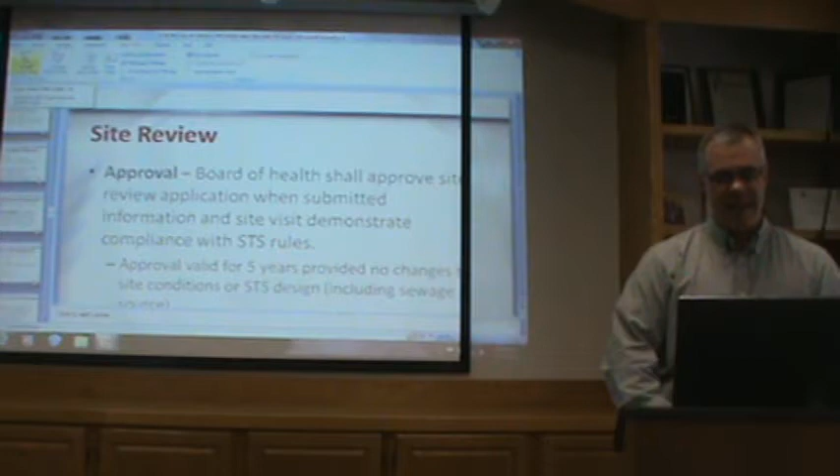Okay, let's get back to it then.

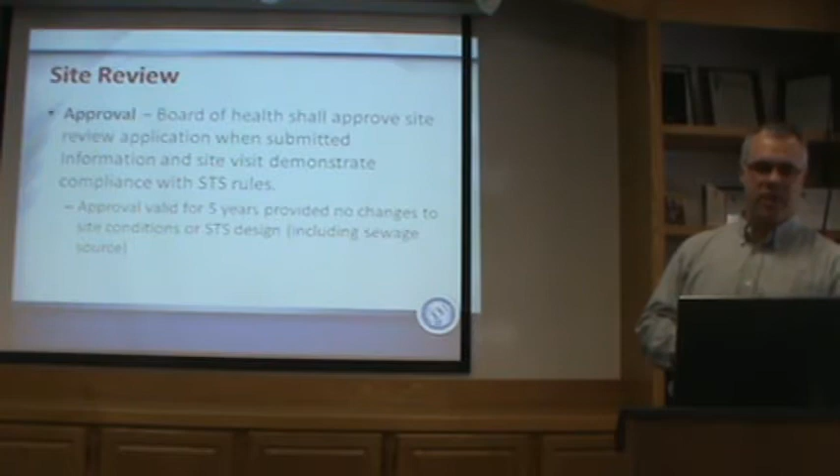Site approval. Site approvals will last for 5 years. Right now, our site evaluations kind of last indefinitely, there's never been a deadline on them. But now they're going to give us a 5-year deadline. I'm imagining that in 5 years, if you are opting to go have us look at that property, we can probably, quote unquote, renew it just by simply looking at it and saying, okay, yes, everything looks the same. With the exception of, and this does happen, someone goes out there and grades the snot out of it and it's all been destroyed. So that's an exception, but it's a 5-year site evaluation term based on the new code.

Permits, we talked a little bit about this earlier, about the deadline and the grandfathering. A permit is valid for 1 year. The board may extend a permit for an additional 6 months. So when someone asks, can it be extended? Well, according to this, it can. Please don't tell people you got 6 more months, that may or may not be on some of these grandfather systems. Permits are transferable upon sale of property, and certainly this happens, they can be revoked, or we might have to change the system type if they go out and destroy it. We talked about one of those earlier already.

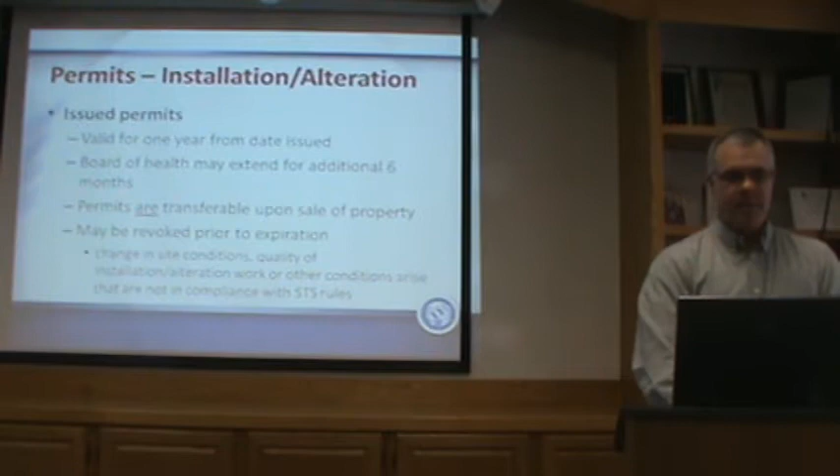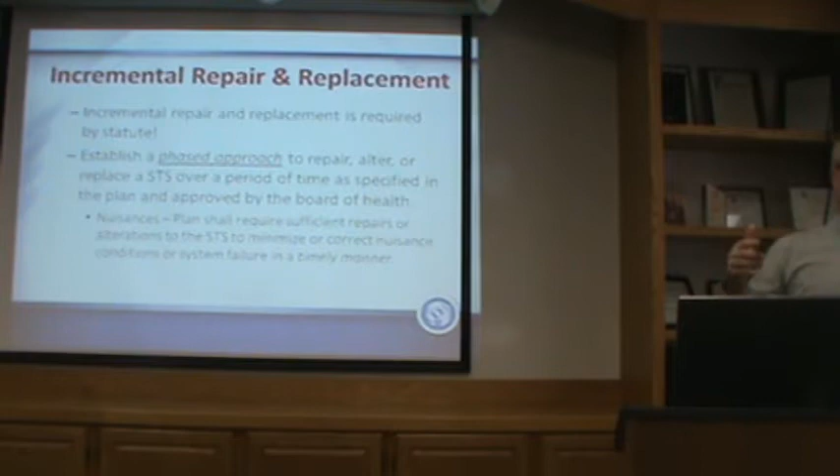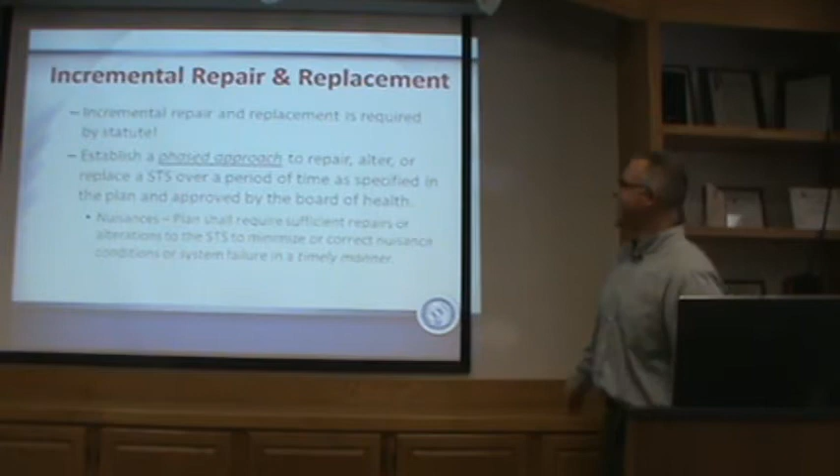Incremental repair. I don't know that anybody has a real good established way of doing this yet, but when it says it's required by statute, that means it's required that we look at it as an option. There are some systems, there's no incremental to them. For example, if you have a quarter acre lot and your leach lines fail and you need an aerobic system, I don't know how you can do an incremental repair on an aerobic system. It's got to be in or it's not, it's all the pieces parts. Start with the disc. Yeah, that's one way to do it. So anyway, we have to look at that as an option for people, but in some cases it's just not an option. But there are times that it is, where you can add some leach lines, get the public health nuisance to quit surfacing on the ground, but it's not a full-fledged installation.

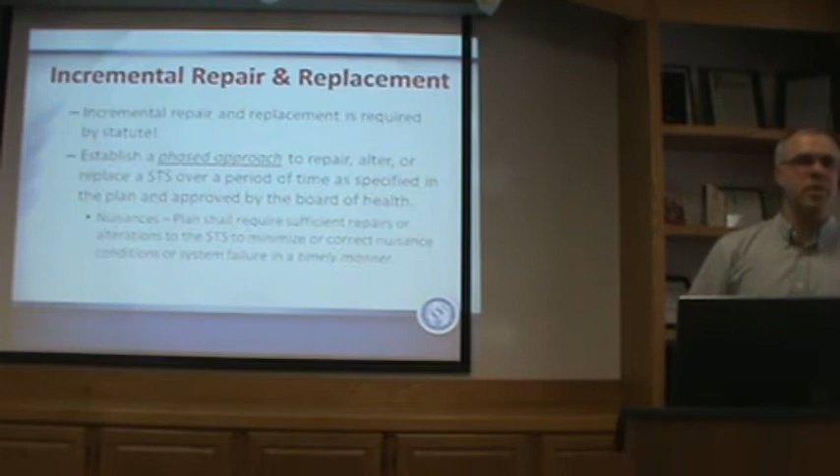So then we can incrementally, and we've done some of that over the years, tried to work with some of these systems and been able to do some of this already. I don't know if there's a hard and fast way of doing it, because every site's different and every approach would be different. But the bottom line is we want to minimize or abate the nuisance and then add components as needed. It's going to cost them more over the long term, it's like having interest. You're going to pay for that guy to come out on 3 occasions versus once. And guess what, we get to issue a permit every time you do it. Probably an alteration, the cheaper version, but nonetheless, over time it's going to be more expensive probably to do it.

And then here we are, the phased-in work. Conditions, we can set conditions on it for when everything has to be completed. Perhaps some soil evaluations need to be done, and certainly water usage. Conserving the water is going to help that system along, or perhaps even have them replace some old 5-gallon flush toilets and put in some of those wonderful 1.5-gallon flush toilets. Maybe something like that.

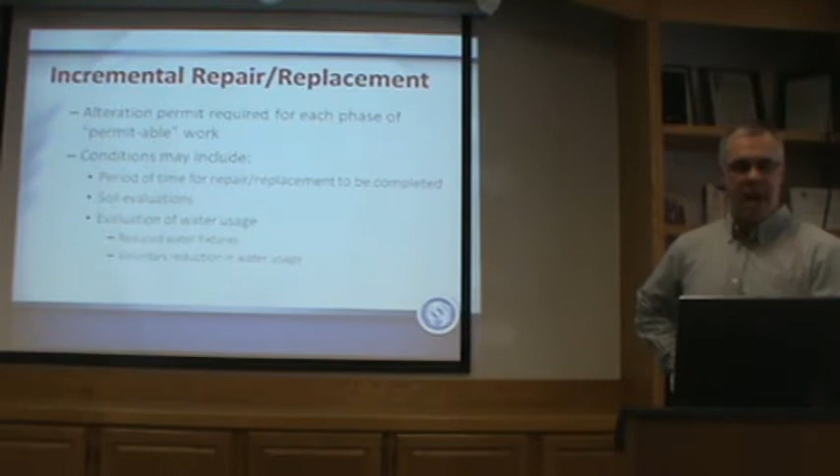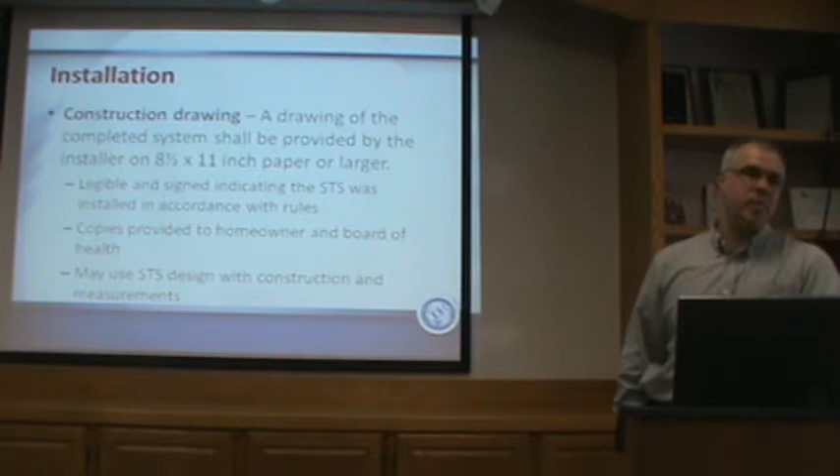Construction drawing, this is the as-built drawings that are required. Basically it just sets some minimal standards for those: 8.5 by 11 paper, legible. We appreciate it when it's legible. Copies must be provided to the homeowner and the Board of Health. So you want to give the homeowner a copy as well as us, and certainly keep one for your records.

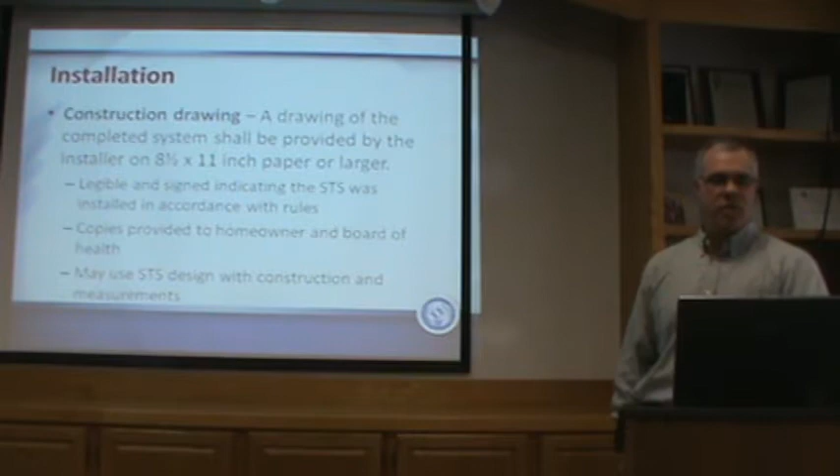Put on construction design measurements. And I wanted to highlight this piece here because sometimes we fail to do this. We want to make sure we're on top of this if we're not doing it already: the elevations, the vertical benchmark, and some elevation readings throughout the course of the system, so we can see that there's been fall installed into the system, and it'll help you also find some of these components with the vertical elevations and being able to determine some of their depth.

Has anybody tried lately, if you had no record on file, to go out and probe for EZflow, especially if they did a good job grading it? It ain't easy finding this stuff. I went out there, or SB2, that's another one. There's been some of that. Without a map, I don't know how I'd have found it in some cases. You probe every 6 inches, go right through it. So anyway, SB2, you get a football and it shoots at you. Some that work okay don't. Anyway, keep those things in mind to find this stuff.

Okay, let's move into flow estimations. Similar to what we've always done in the past, 120 gallons per day per bedroom. That's what we've always had for a number.

They clarified this, because here's what happens sometimes. We'll go out to a property and say, hey, your system's blown out, and they have an event counter, and we find out they're using too much water. Then I'll say, well, you're using 360 gallons per day, and that's too much. And they say, whoa, no, your system was designed at 360 gallons per day. No, that's not how this works. The law has now clarified this. 360 was peak estimated flow, peak. We don't expect you to do that every day. You might do it on occasion.

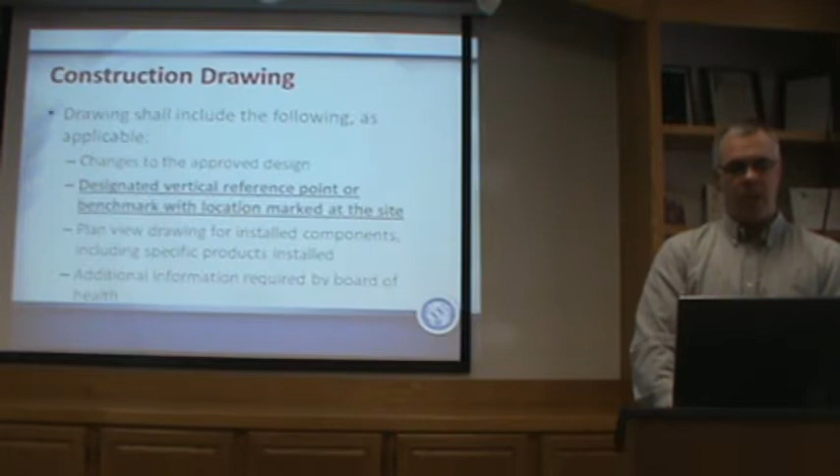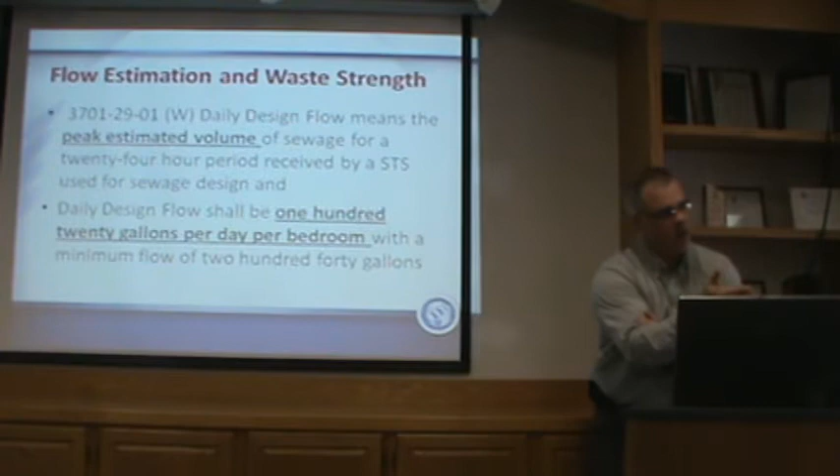Tom asks, what number are you using per person per day, just in casual usage? Well, the law does it by bedrooms. I understand that. Say there's 10 people in the house, and it's a 2-bedroom house. Is there a number? Well, you could do it a couple different ways. You look at the literature, and you might see 100 in the literature. The 10 state standards, basically 10 engineers from 10 states got together and said this is what we're going to use as a basis per person for design flow going into a sanitary sewer.

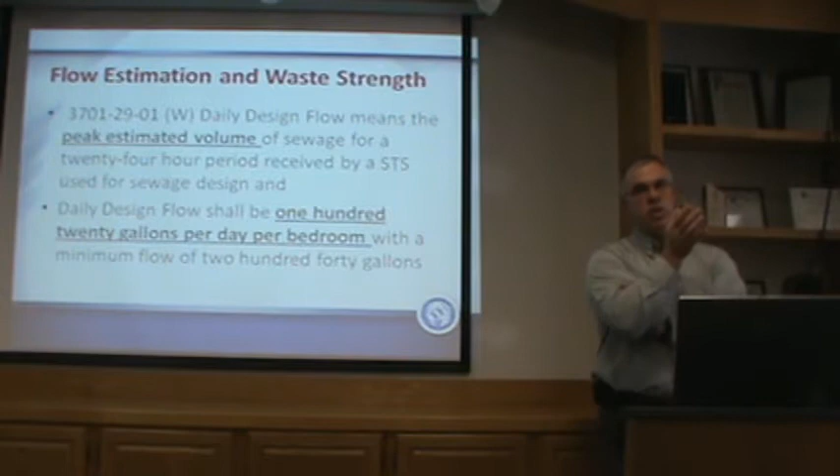And I've heard numbers like 60-ish, because you've got 120 gallons per bedroom, and you can put 2 people in a bedroom. This is all theoretical. So 60 gallons per person. I'd say 60 to 100 is probably a pretty safe range, which is each standard, a rule of thumb. But 120 is your standard, that's what you have to go by.

Probably depends on hygiene too. That's a joke.

Plus or minus, do we need to do a water study on some of these people where the systems are blown out all the time before you design the system? Just put a water meter in or have them track stuff?

Paul's asking, what if you have a system that needs to go in and you suspect a high flow, particularly if you've got a system that was recently installed and blows out in 2 or 3 years. We have asked for water meters to go on, and we've told them, you got 10 kids, we have no idea what you're putting out, but it's obviously too much. If I go out there and put another replacement system of similar or slightly larger size, it may not be big enough for you. So we have asked, in questionable circumstances, for that to happen. Sometimes it's like pulling teeth, but they don't realize that, how else do we know?

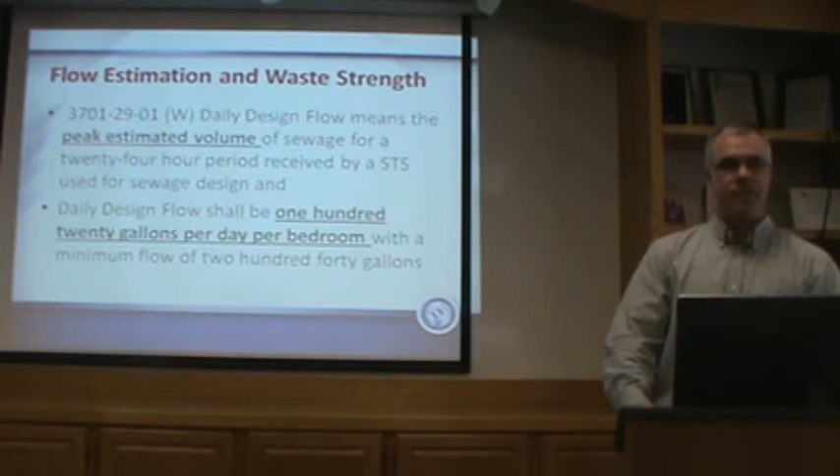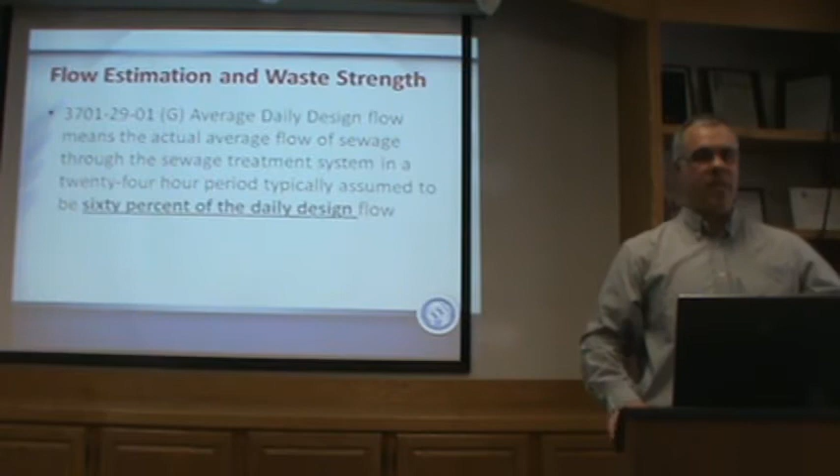Particularly on gravity systems, but under statute codes, are you allowed to make them go bigger if the house is only 3 bedrooms? That's where you'd have to get into the study and find the section, but yes, we are allowed to increase flows. We just designed a 6-bedroom system if there's fixtures or other reasons to do it. So you've got a big garden tub, a family with 3 bedrooms but 10 kids, I'd say yes, we'd be well within our rights to try to do that.

Well, that's what we were wondering, I didn't know that, if you had to stick to the 120 gallons. Not necessarily, not necessarily. You've done it with us before, we've increased the systems. The homeowners actually said, we use a lot of water. Yeah, that's voluntary though, telling us ahead of time. No, it wasn't voluntary, give them an option.

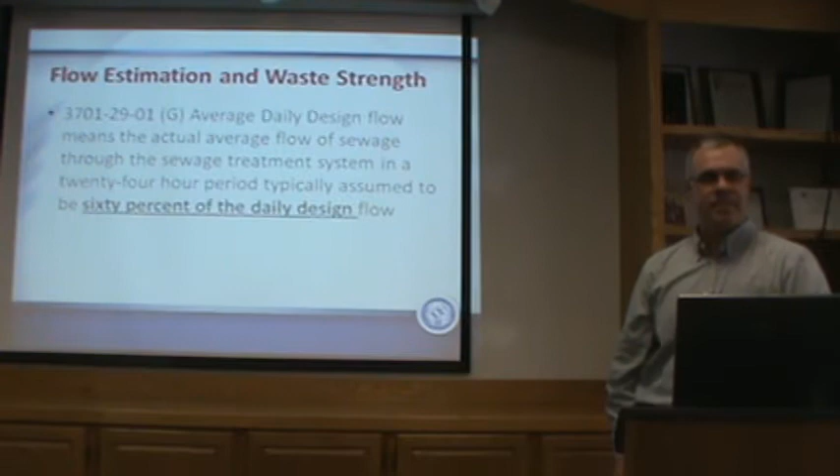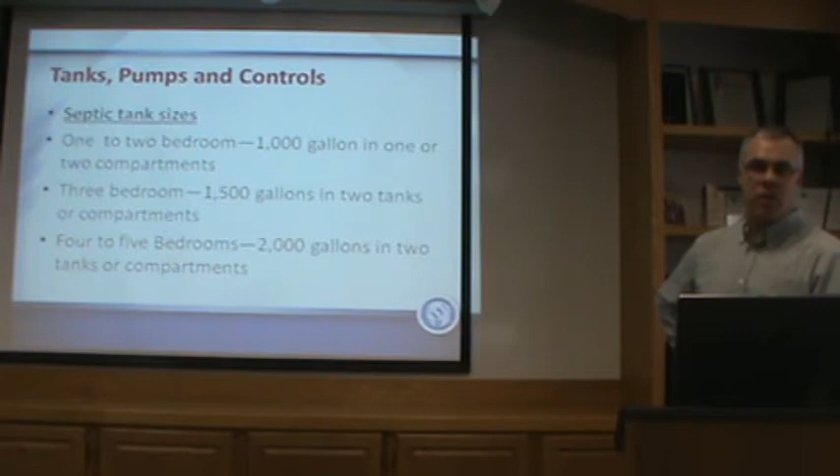All right, moving on to tanks. Tank capacities are the same as where they're at today for systems. 1 or 2 bedrooms, 1,000 gallons. 3 bedroom, 1,500 gallons, 2 compartments or 2 tanks. And 4 and 5 bedrooms is 2,000. I stopped there. There is one for 6, and there is one for small flow system designs, but we won't go over that today.

Those of you who do tank manufacturing, January 1st, 2016, they're talking about having a director's approval for those septic tanks manufactured for use in Ohio. So I don't know much about that. You might want to read that section a little more carefully or contact ODH if you want more information.

So if you have a tank custom built, he's got to get it approved, like a pump tank? We're getting these bigger and bigger pump tanks. Yeah, I don't know the answer to that. I'm thinking the tank manufacturer's going to be approved and have various products approved, but I can't say. I'm looking at the spray, the minimum is 1,500 plus 500 per bedroom. Oh. We'll have to see about that. I mean, it'd be ridiculous if you need a special tank and he needed to get that approved. Oh yeah, that's gonna drive the special tank price through the roof.

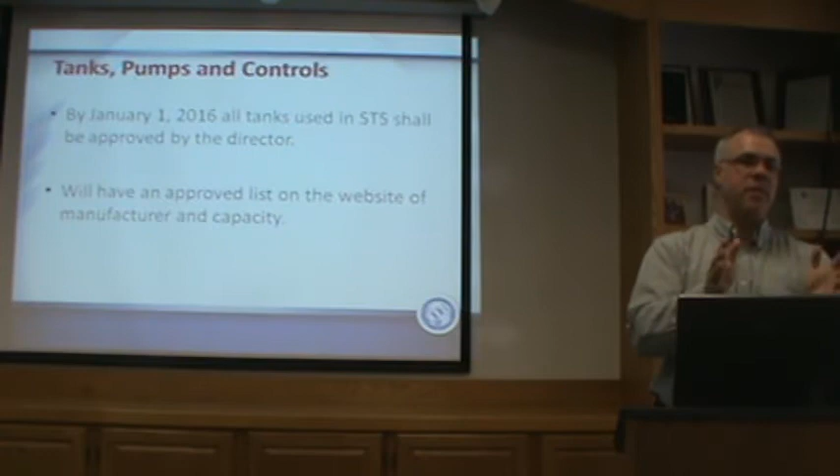Yeah. And there'll be a website, once this happens, if you have a tank manufacturer that you're not sure is approved or not, you can go onto the website after 2016 and verify that their tanks are approved by the director.

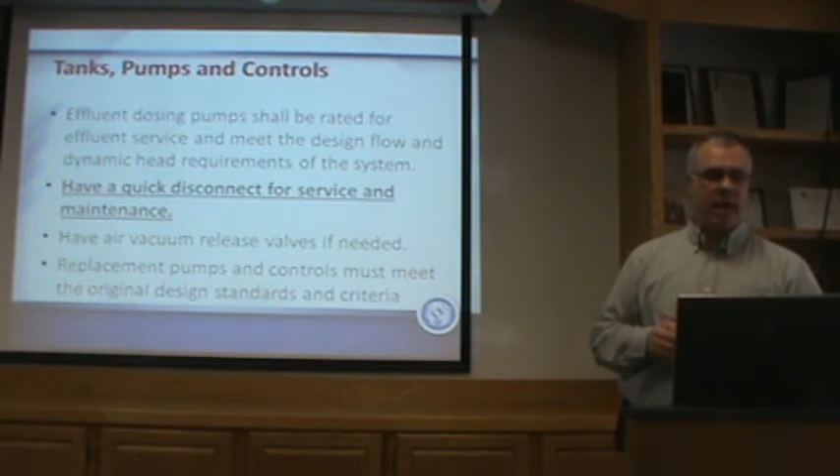Tanks, pumps, and controls. The one thing I want to point out here, because we don't always see it, is it now does require a quick release or quick disconnect on a pump for service and maintenance. So some guys don't do that, and you do need to do that now. All right, I just skimmed right across that stuff, and there's probably much more to be said, particularly about pumps and controls. But for the sake of time, we're not going to get into that.

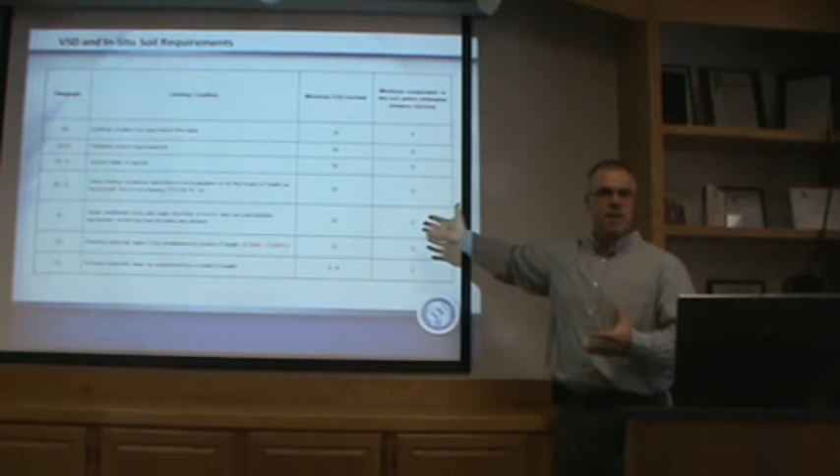So all that stuff is being covered here. This is a table that's in the rules, and the verbiage spells it out also. There's a lot of different soil characteristics that have various levels of risk associated with them spelled out in this table. So bedrock has the highest risk. Then you get down into seasonal perched water table, which if you recall in 07, in my estimation, that's what killed the 2007 rules. Seasonal perched water table vertical separation distance. It was just a mess. So many people were putting it in the seasonal water tables that they just couldn't come to grips on that kind of a change. So now it's come back.

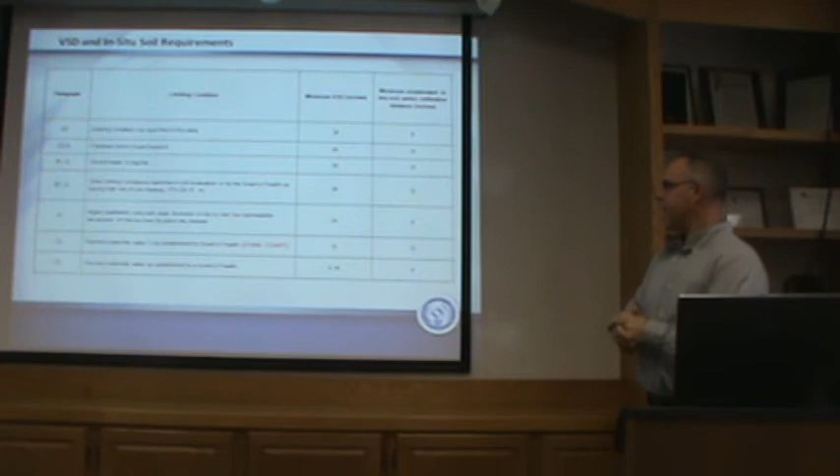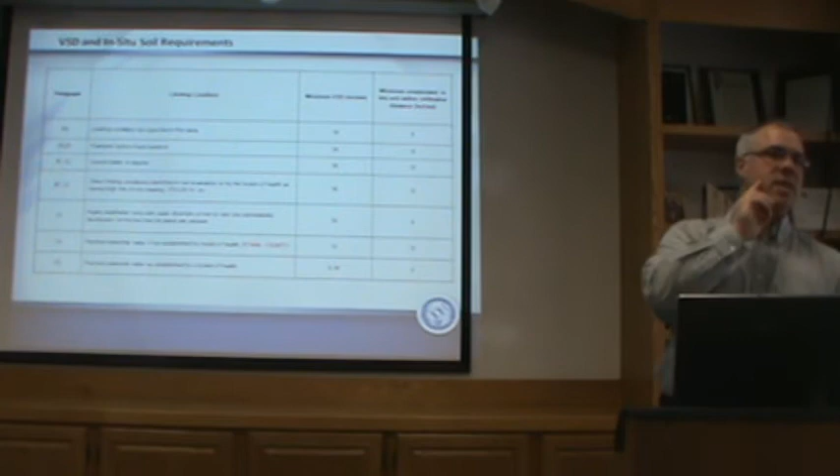State law allows every Board of Health, if they so choose, to establish a minimum vertical separation distance to seasonal water. And that law says we can do it anywhere from 6 to 18 inches. You choose. You need to know this, because as you work in other counties in the state, you're going to find that everybody did this differently, and that means your system designs are a bit different. We want state consistency, but it's not necessarily there, primarily because of that. Okay?

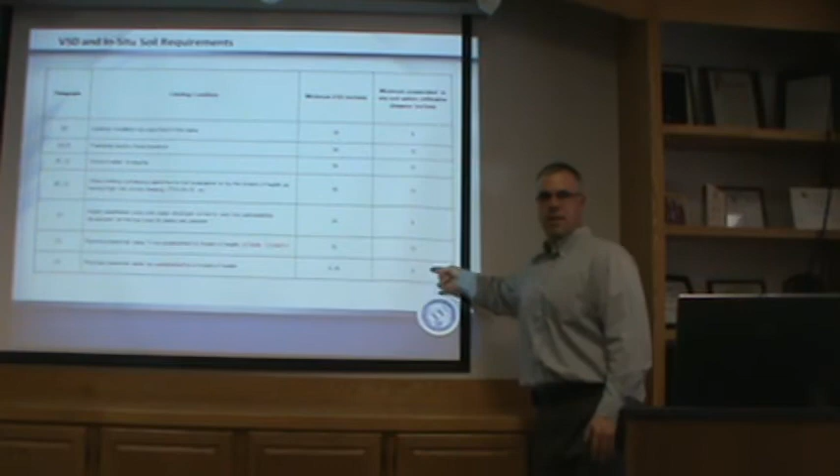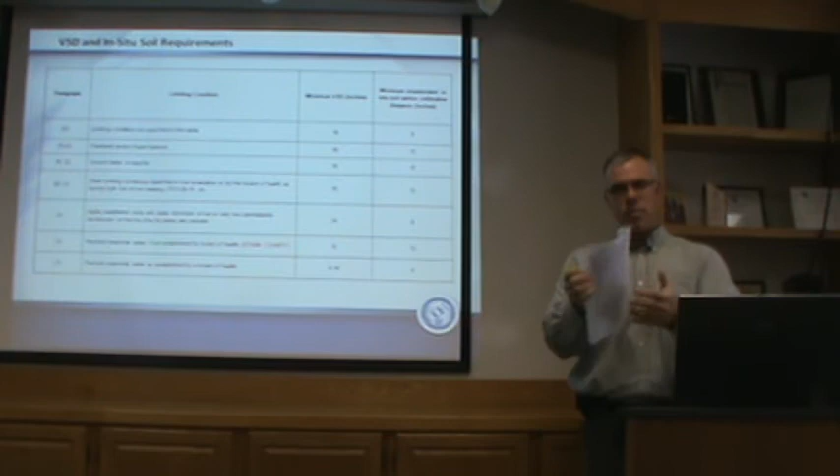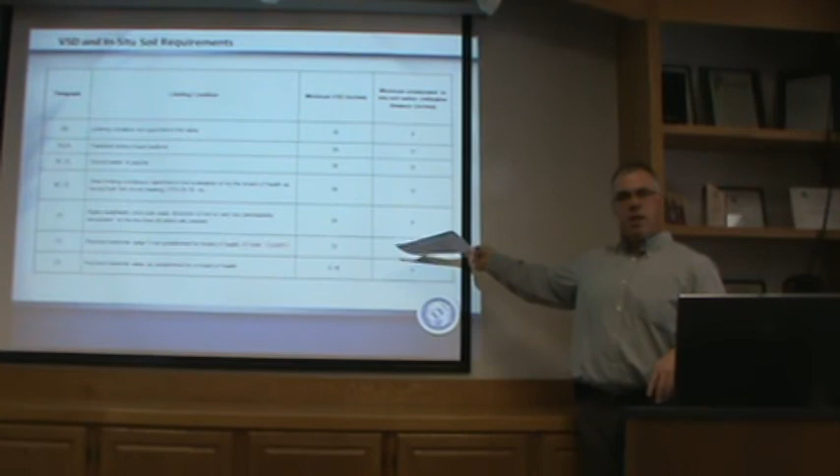State of Ohio said if the local health department doesn't choose to adopt a vertical separation distance, they give you a default, 12 inches. This rule that I talked about earlier, most of it's about O&M, but on the back page, establishment of vertical separation distance. Our Board of Health did adopt 12 inches. However, the state minimum here was 8 inches. 8 inches of in situ soil for the distribution of septic tank effluent.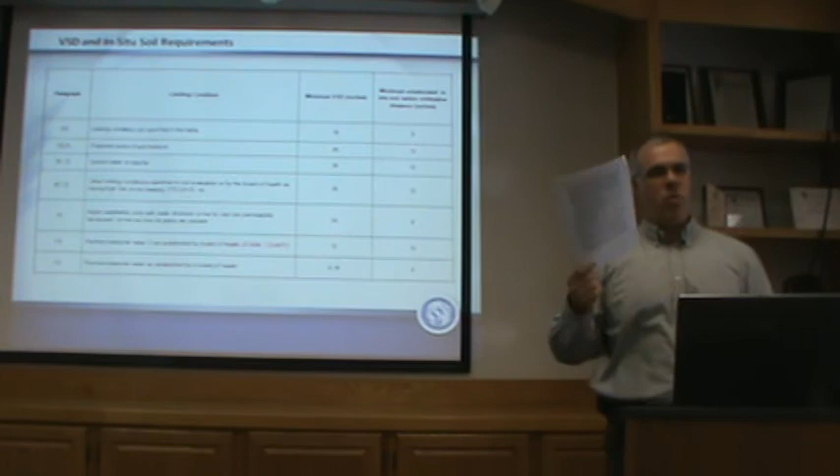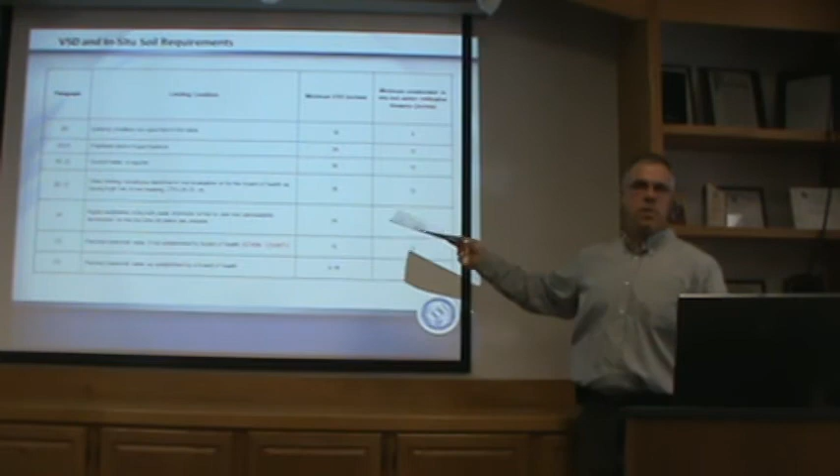8. The board took it to 12, so it's 12 and 12. 12 inches of vertical separation and 12 inches of in situ unsaturated soil to be present underneath the soil absorption system to the seasonal perched water table. 5%. Pardon? That's at 5% mottling.

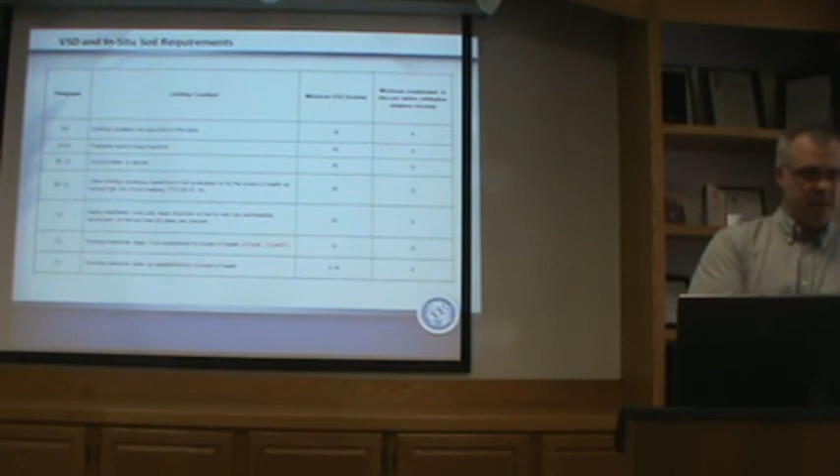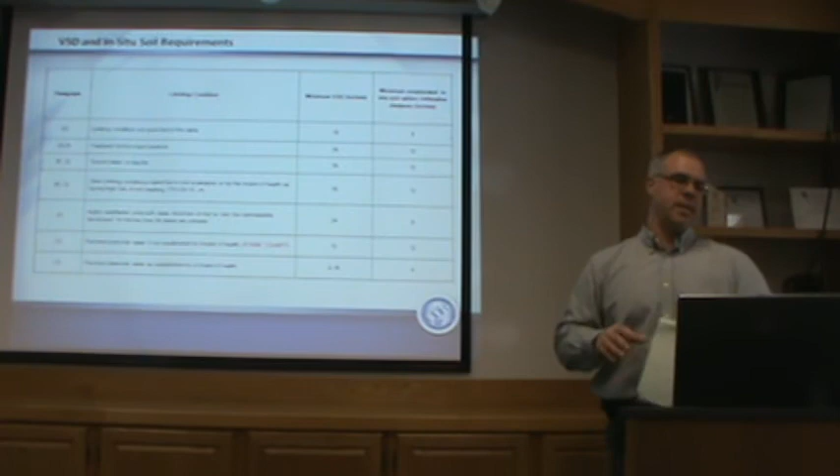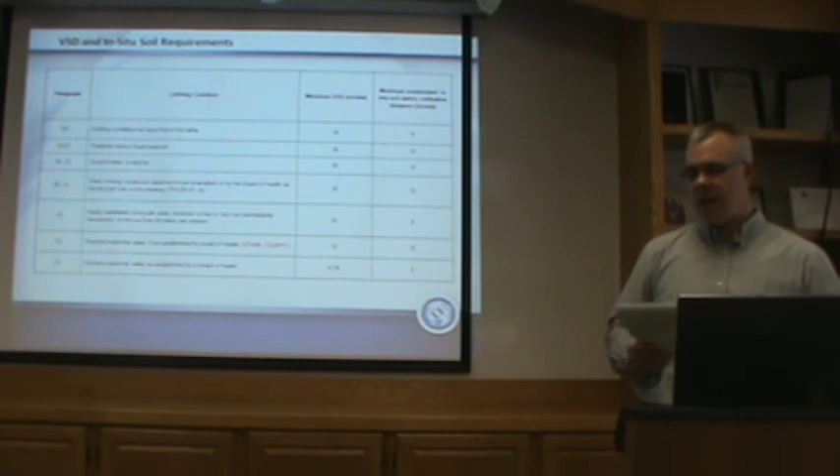I'm glad you brought that up, because that's in my notes to tell you. It's not in any of the stuff that I have to show you, but the definition of seasonal perched water table has changed. It used to be 2% mottling, create certain depletion colors. The soil scientists, they use these different colors to determine depletions or mottling. It went to 5%. So you that sit in the room are soil scientists, that line that you draw on our page, it tells us where that's at. You might be lowering that line a little bit to 5% instead of 2%.

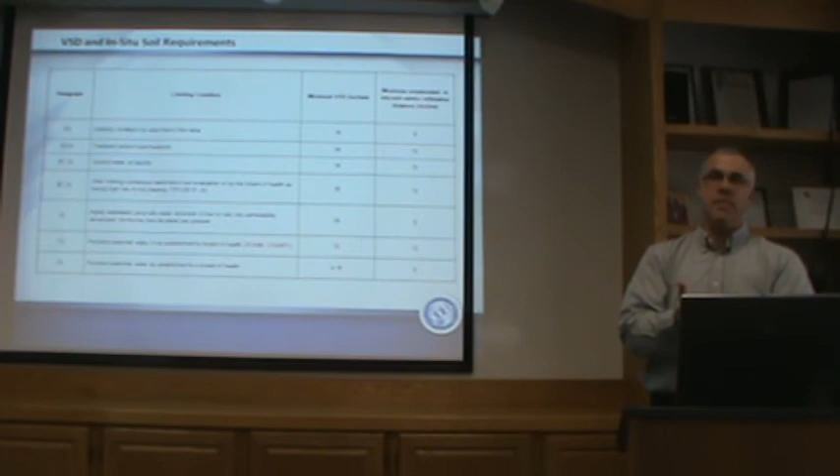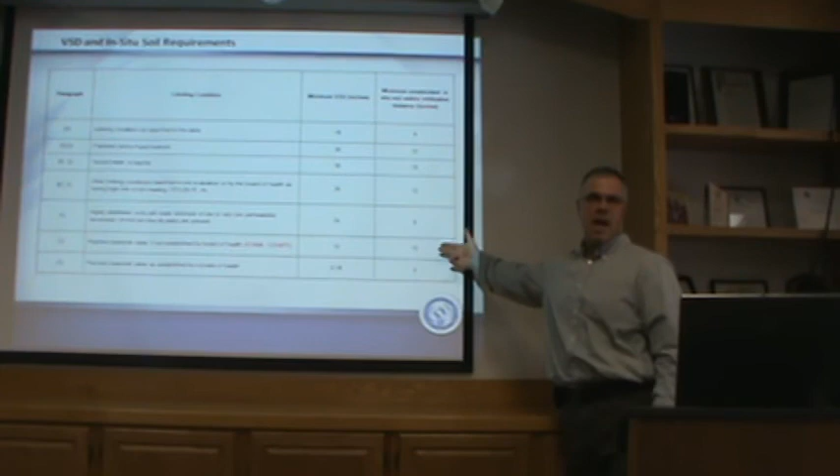You know what? There's a lot of times it makes a big difference. Several inches in many cases. So anyway, the law established these. Many of these you're already accustomed to, but the biggie that's really driving costs and design is that one right there. Septic tank effluent, vertical separation distance.

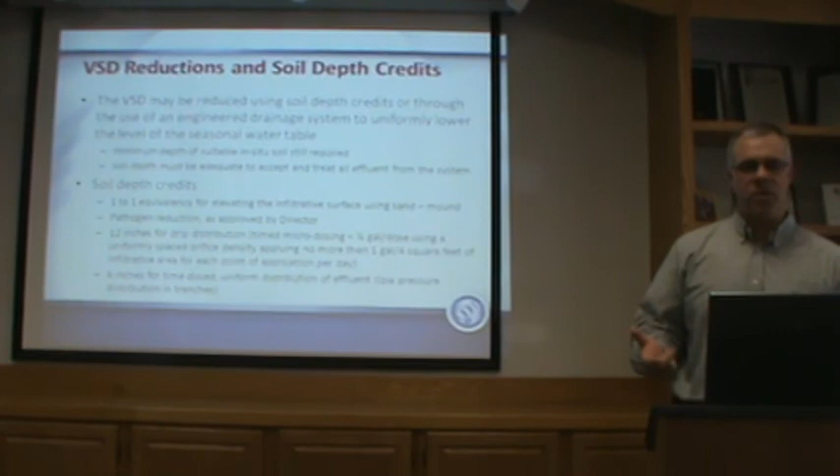So how can I reduce them? If I need to reduce vertical separation distance, what are my options to reduce them? So let's say I want to get that system farther in the ground. I prefer not to use a mound system, whatever the case may be. What can I do?

Oh, no, thanks. I saw me stuttering. I need more coffee. Just fresh coffee.

What can I do to reduce the vertical separation distance? The first one we're going to touch on a little bit is the installation of an engineered drainage system. Not a curtain drain, not an interceptor drain, an engineered drainage system so that you actually do the math or use modeling to show that that drain will in fact reduce the water table down low enough for you to put that system at the depth you're asking for. So that's one way.

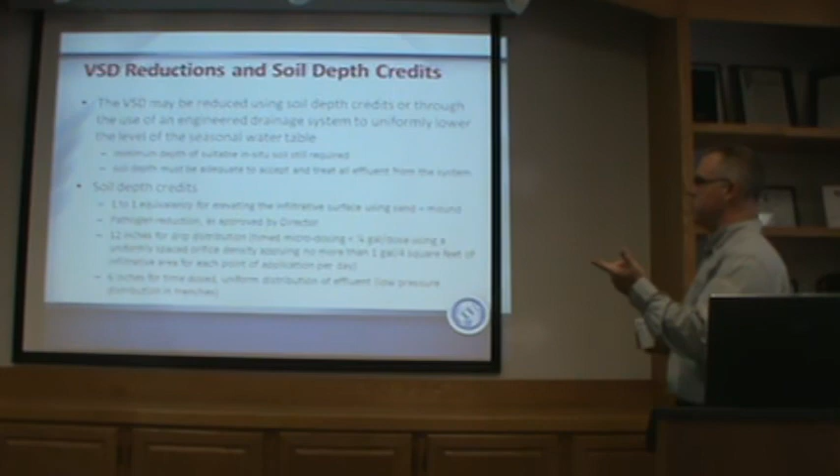The second ways are ones you're already accustomed to. A 1-to-1 equivalency for elevating. So if you put a mound in, let's say you had bedrock at 2 feet and you need another foot. You can put a mound in with a foot of sand material, then put your distribution system on top. You would then meet the 3-foot vertical separation distance if that's how you wanted to do it. Another option would be to put a pretreatment device to buy credits and put it down in. And that's actually number 2 there. Number 2 is using a pretreatment device to clean it up some and get credit for that vertical separation.

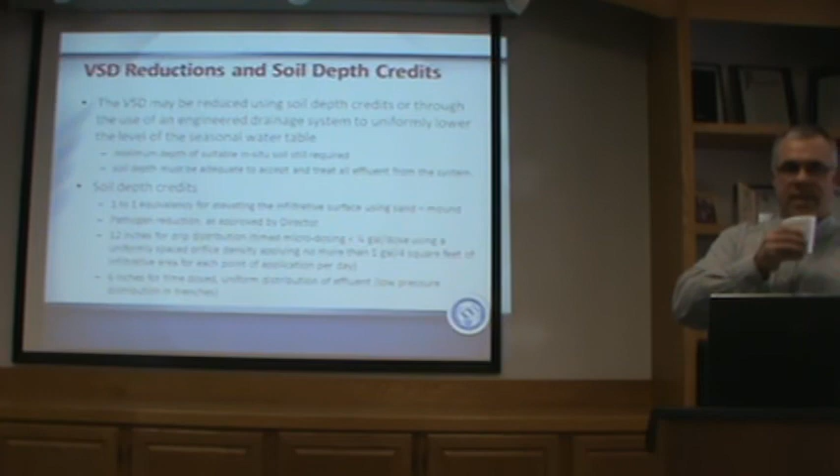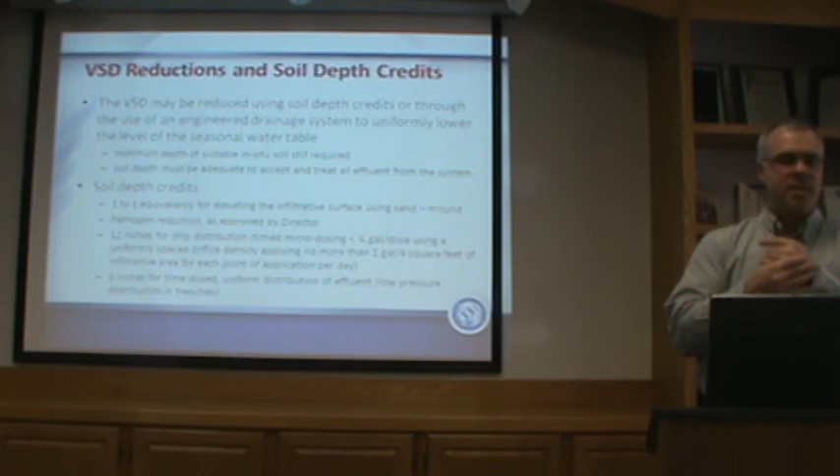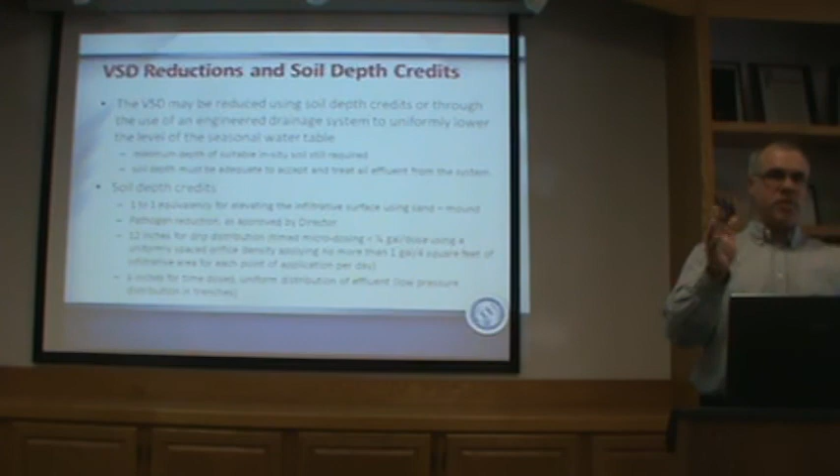the state law said was the Board of Health should adopt a vertical separation distance for pre-treated effluent. And that distance had to be, they gave us a range again, it's no longer 6 to 18, it's 0 to 6. Pick something between 0 and 6. We picked 6. Personal view, and as I have historically looked at systems and how well they function, 0 is not a good way to go. So we picked 6. You can get 6 inches off of the seasonal perched water table with a pretreatment device meeting the right specifications. How'd that go with the builders? I didn't tell them.

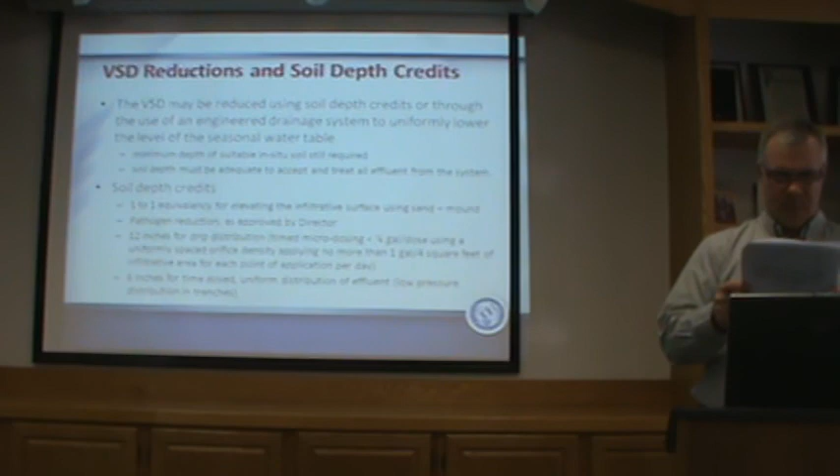Is that just an aeration, or do you include an LPP or flood dosing then? I'd have to read how that. You know what, Paul? I have it right here. Let's see how that's actually working. Summit's doing 6, or was doing 6 with an LPP. Okay, here's how it reads. In this language, all I did is I took it out of the state law and I just inserted our numbers. So this is the same, the wording's terrible, to be honest.

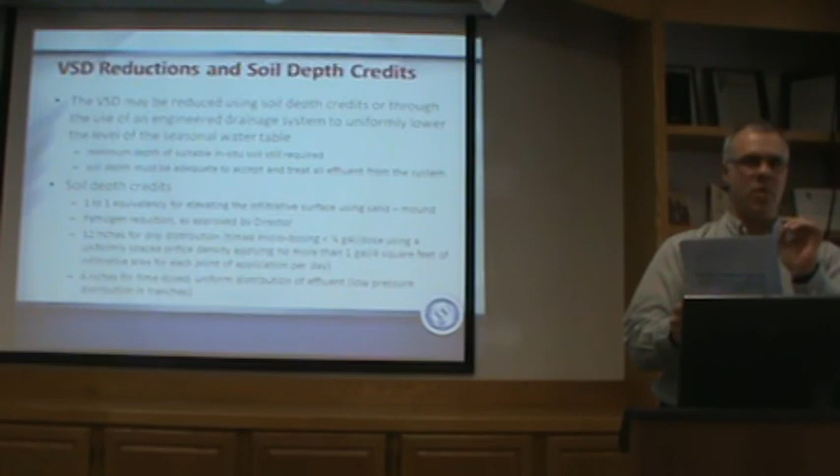A minimum vertical separation distance of 6 inches and a minimum in situ soil thickness within the vertical separation distance of 6 inches, 6 and 6, just like it was 12 and 12, may be used where the seasonal water table is present and the sewage effluent is pre-treated to less than 1,000 fecal coliform per 100 milliliters. So we're talking pre-treatment, not other methods. Yeah, and you're talking less than 1,000.

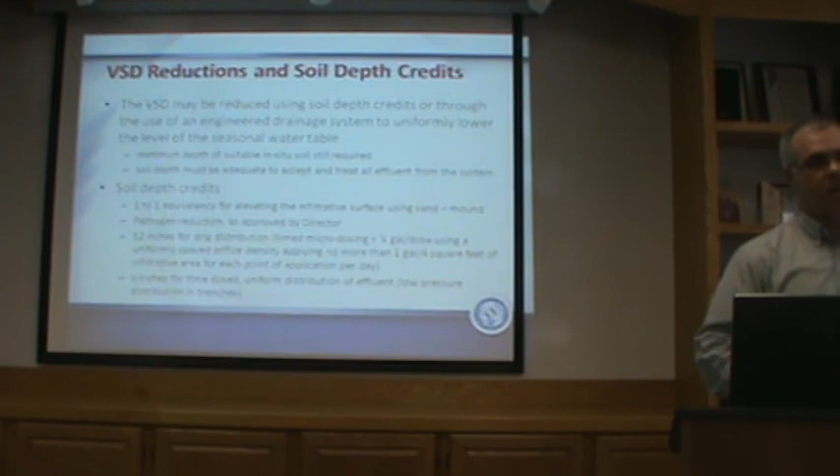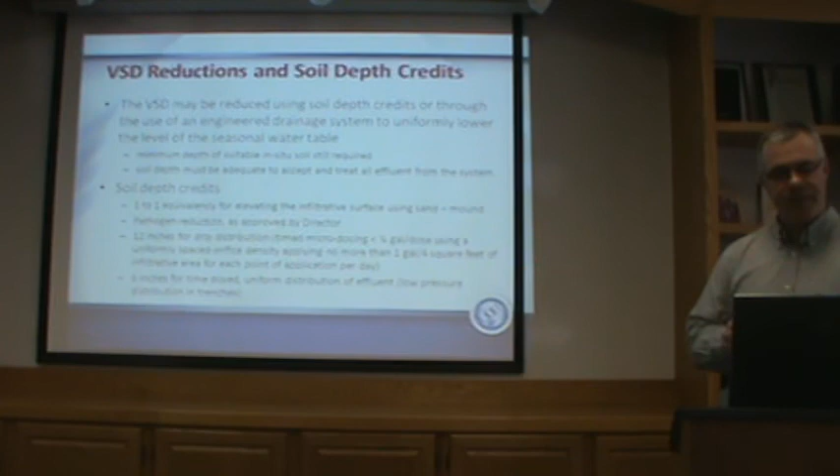Is that in a PDS? Yeah. Okay, I don't recall. Just an aeration won't get you in. You've got UV. The 1 foot soil depth credit doesn't get you there, huh? No. The 2 foot one? Yeah. So the 2 foot. So you're talking all the goodies. Yeah, you're talking all the goodies. You probably don't need re-air, but you need the UV. Okay, good to know. All right, the third thing